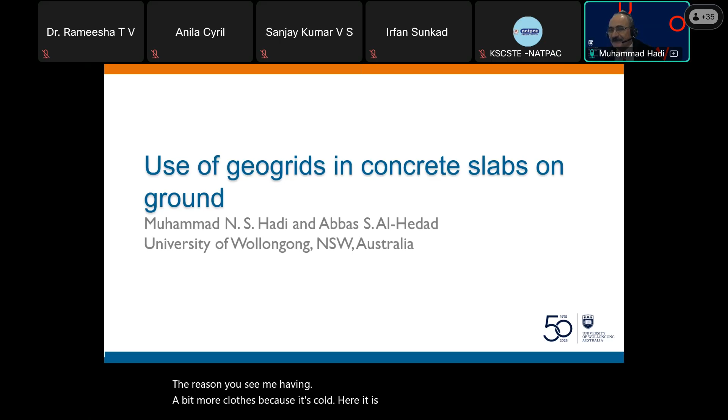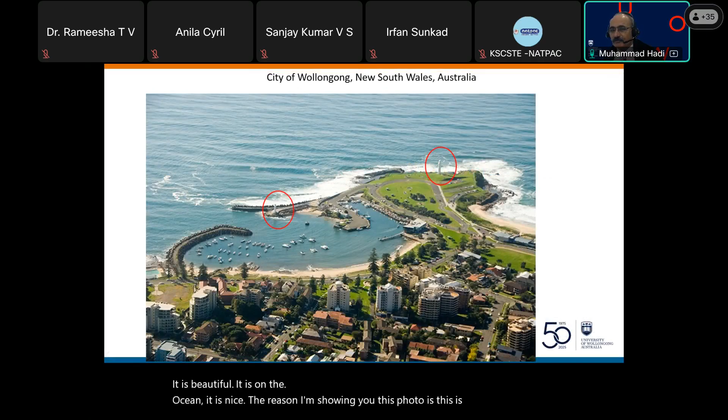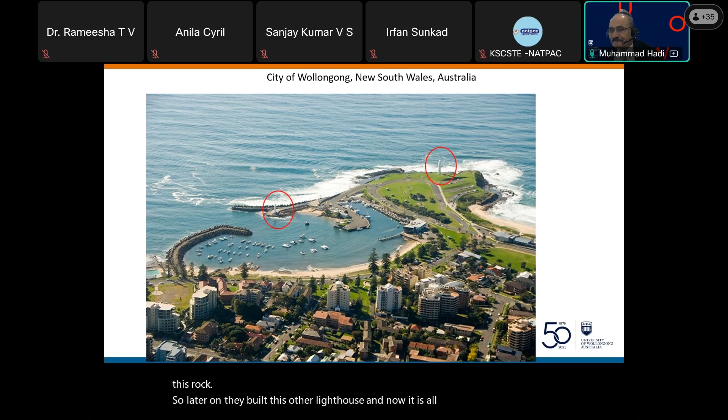So this is Wollongong. It is beautiful. It is on the ocean. It is nice. The reason I'm showing you this photo is this. This is a lighthouse. So people coming from the north can see this lighthouse, whereas people coming from the south cannot see this lighthouse. So they crash into this rock. So later on, they built this other lighthouse. And now it is all electronics, so there's no need for it.

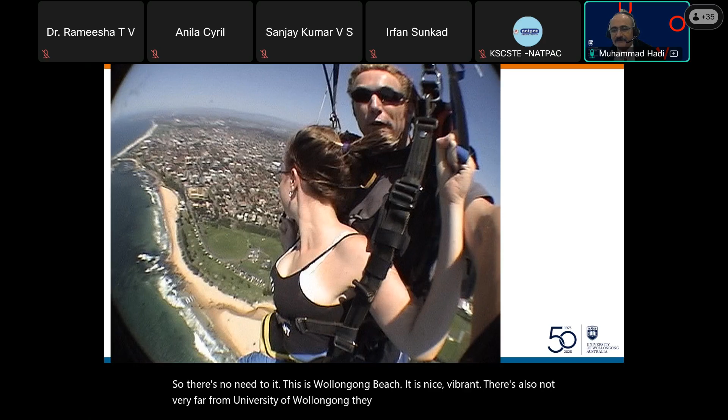This is Wollongong Beach. It is nice, vibrant. Also not very far from University of Wollongong, they do skydiving. And this is Stanwell Park. We are Wollongong. We are just south of Sydney, 80 kilometers south of Sydney. Australia is very, very big. Not as big as India, but it is big with a very small population.

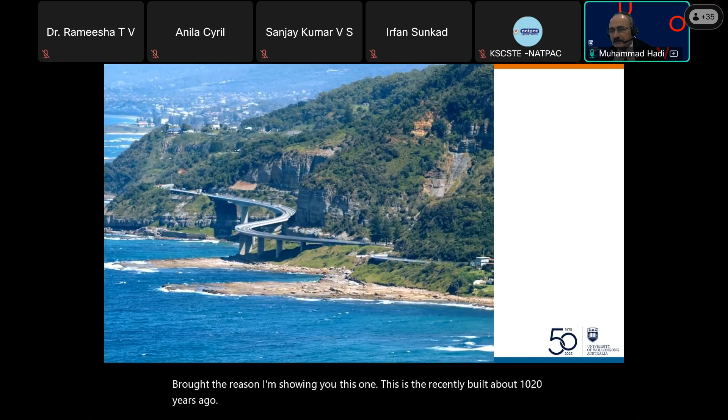There is a train, and of course there is road. The reason I'm showing you this one, this was recently built, about 10, 20 years ago. And here they used cathodic protection because this road, this bridge, is right on the ocean. So enough about UOW, University of Wollongong.

So I'm going to talk about some background, then geogrids, experimental program, results, conclusions. I'm going to end this part of the talk with another building at UOW, University of Wollongong. And then if time allows, if you allow me, I can show you what we use, the design method of rigid pavements based on Austroads.

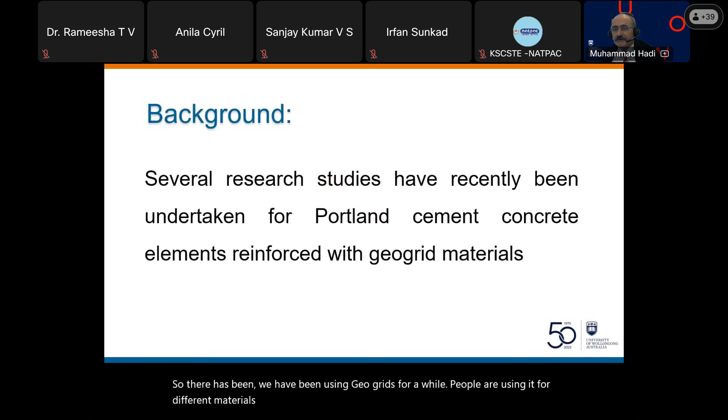So we have been using geogrids for a while. People are using it for different materials. And what is geogrid? Geogrid, they use it mainly for geomechanics, for retaining earth and the like. But we used it for a different purpose.

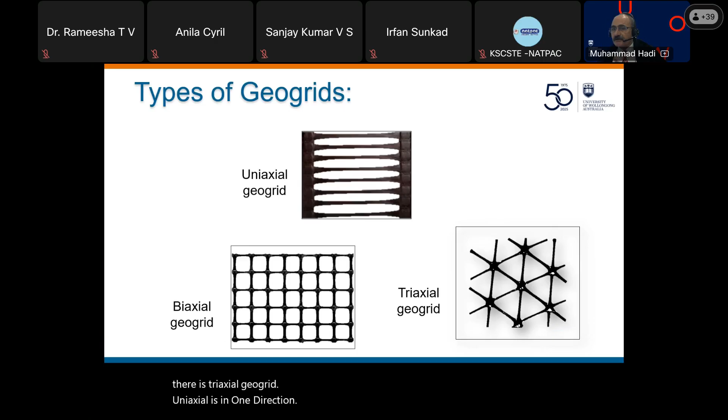Anyway, what is geogrid? So there is uniaxial geogrid, there is biaxial geogrid, and there is triaxial geogrid. Uniaxial is in one direction, biaxial 2 directions, and triaxial is in 3 directions. So people have used it in beams to reduce the cracks, and they put cyclic loading.

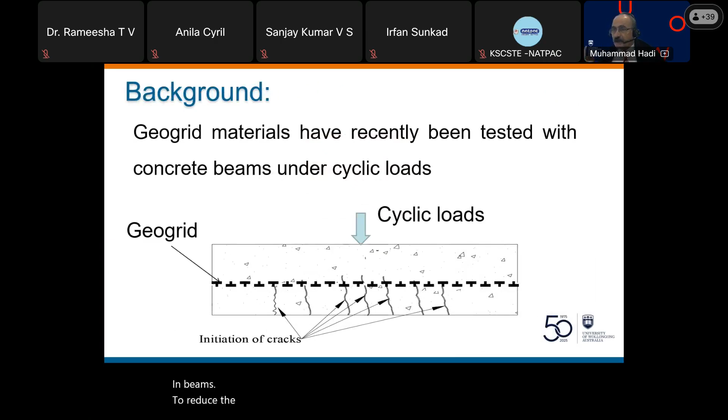So what is triaxial? It has high tensile strength, high corrosion resistance, and high tensile elongation. And I have to admit, I'm a structural engineer. I don't know much about these things, but we learned.

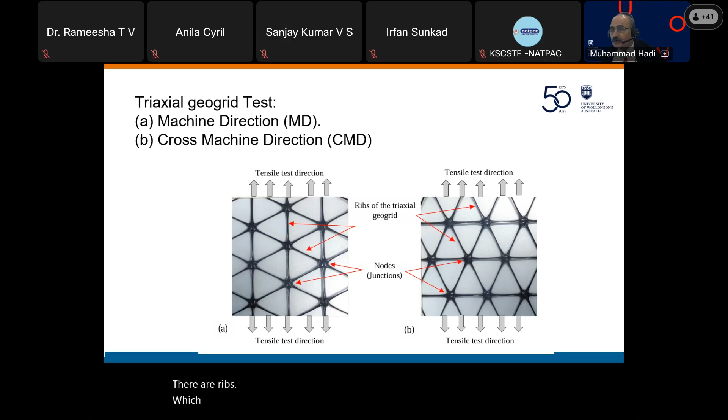And those geogrids, they call it machine direction, where some ribs will be parallel to the load direction, and cross machine direction, where these will be all diagonal. So the photo on the left is machine direction, and the photo on the right is cross machine direction. There are ribs which connect the nodes or the joints. So this is in general the geogrids.

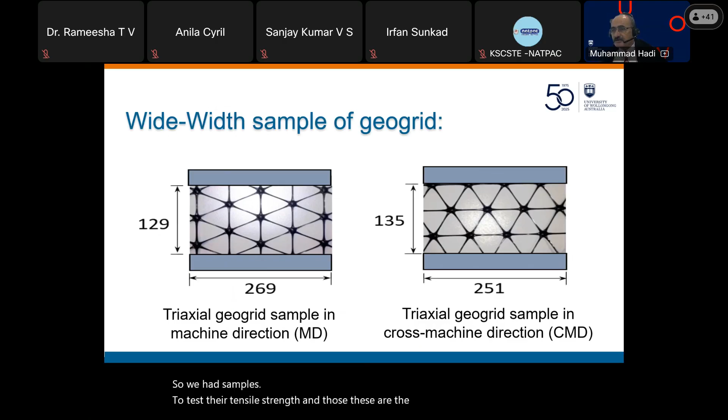So we had samples to test their tensile strength. And these are the dimensions based on the standards that we used at that time, ASTM and European standards.

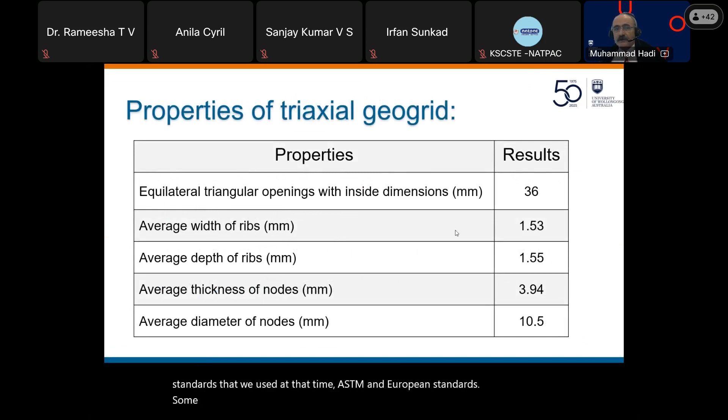Some results: the distance of those equilateral triangular openings, 36 millimeter internal; average width of ribs, 1.5 millimeters; depth of ribs, again, about 1.55; thickness of nodes, about 4 millimeters; and diameter of nodes, about 10 millimeters.

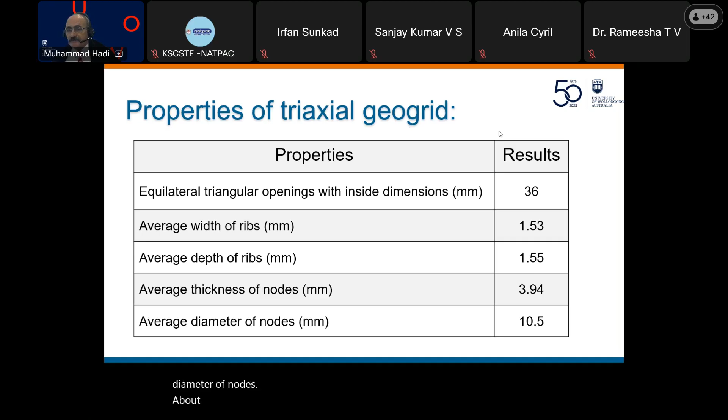So in our labs, we always do tests for concrete, for steel, and the like. But this one is different. So we had to build the jigs, the loading heads, and we used our Instron, which is a 50-ton, 500 kilonewton universal testing machine, and it has lots of properties. And we tested those materials, the triaxial geogrids, in 2 directions, in machine direction and in cross machine direction.

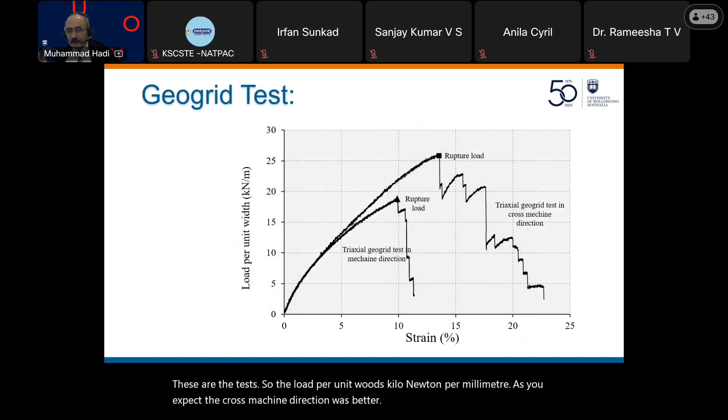And these are the tests. So the load per unit width, kilonewton per meter. As you expect, the cross machine direction was better because you are relying on the diagonals, not only in the rupture load, but also the strain.

We did some physical tests, and the elastic modulus is about 2.8 gigapascal. The rupture load, 19 and 26 for the machine and cross machine direction respectively, and the strains, 10 and 13, machine and cross machine respectively.

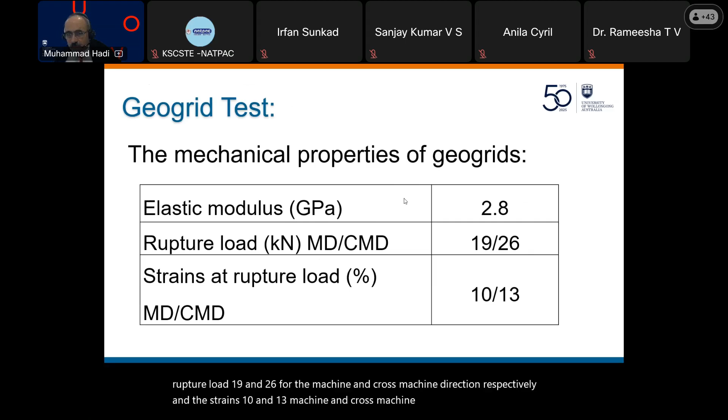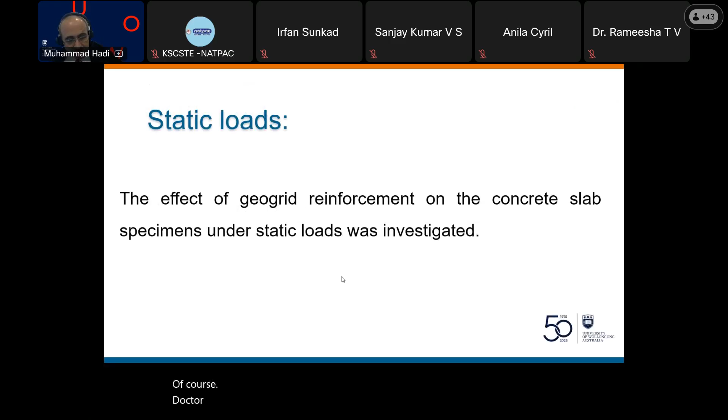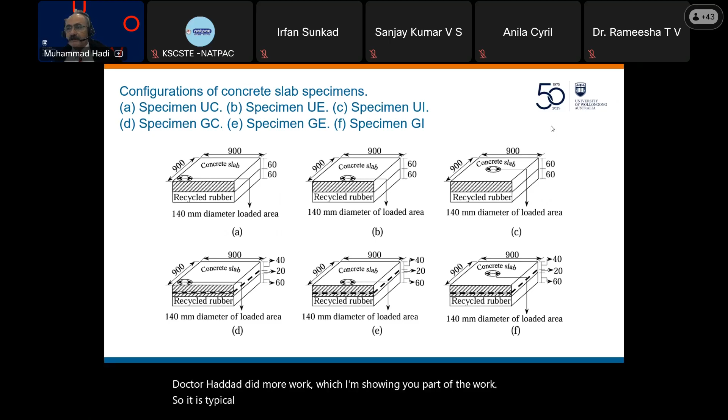We continued to look at the effect of geogrid on the concrete specimens under static load. Of course, Dr. Haddad did more work, but I'm showing you part of the work. So it is a typical investigation, and about 100 years ago, a gentleman called Westergaard came up with equations based on Winkler foundation, and there were three cases for loading concrete pavements: one corner, one edge, one internal.

So for this part of the research, we did 6 specimens, 3 unreinforced, 3 reinforced. And we tested them under loading concrete slab, loaded corner, edge, internal. The slabs were 900 by 900 millimeter, and the depth 60 millimeters. We put one layer of this geogrid material, triaxial, at 20 millimeter from the bottom of the slab. The load was circular, 140 millimeter diameter. So all those were easy.

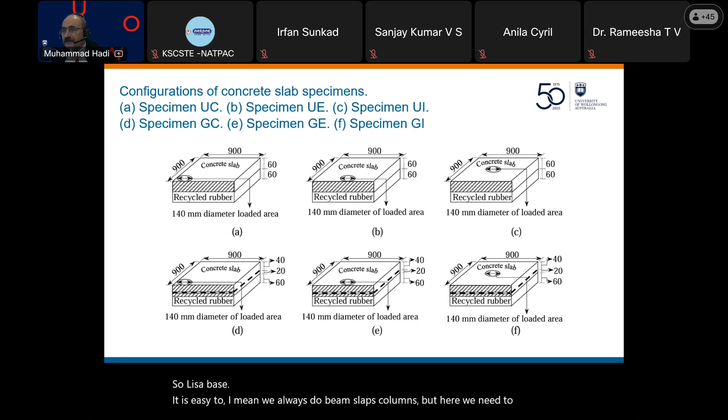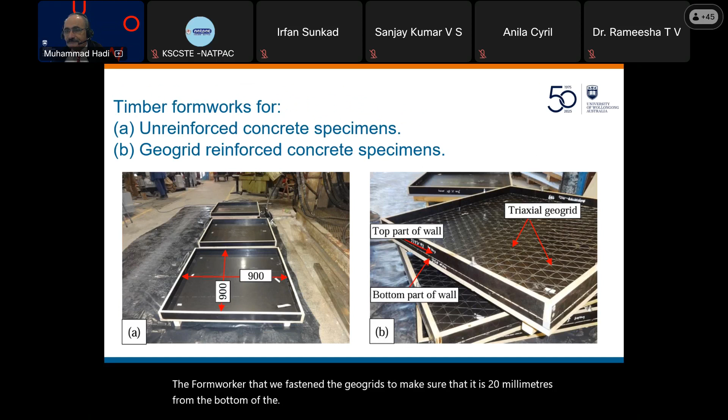So, the subbase. We always do beams, slabs, columns, but here we need to model the subbase. And to do this, we looked at a couple of materials. Before then, we had this formwork, 900 by 900. We put the formwork and then we fastened the geogrids to make sure that it is 20 millimeters from the bottom of the slab. Then we encased all this in a steel base. And of course, we manufacture all these things. So the formwork, all those are manufactured by ourselves.

Now, we came up with the subbase. The subbase, we cannot put it on steel, but we need to have something which has similar properties, which is what we call subbase material. The rigid pavement, we call it base, and the layer underneath, we call it subbase. So we looked in the market and we found recycled rubber. And actually we bought it and then we tested it similar to a plate loading test to end up with a K, modulus of subgrade reaction, to simulate the subbase. And 2 layers, 30 millimeter each of the recycled rubber. This is the subbase, and our base is the concrete slab.

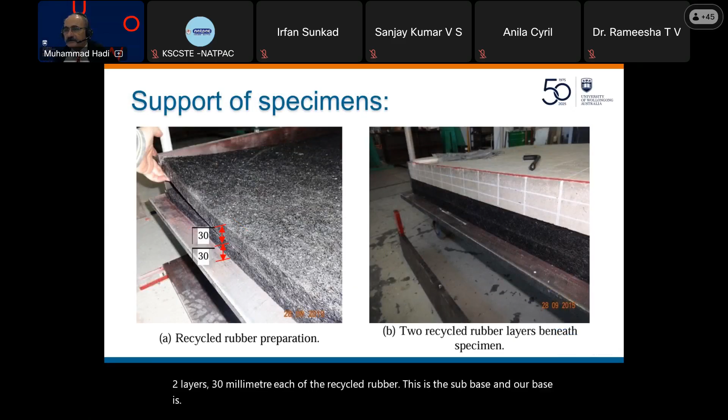Now I want to show you something here. This is before and after testing. You can see that the geogrid didn't move a lot. So we have reasonable casting. This is the section after the testing.

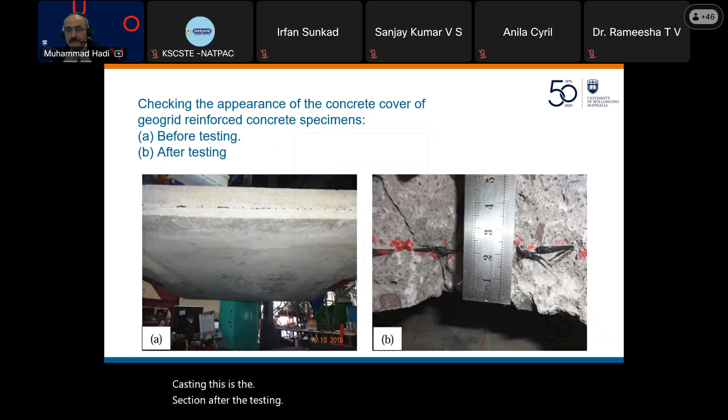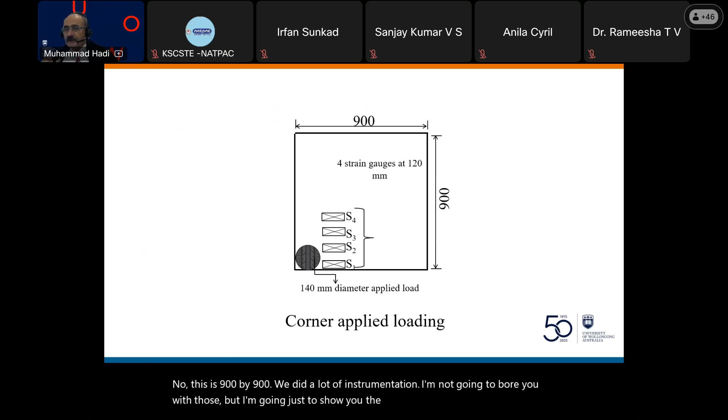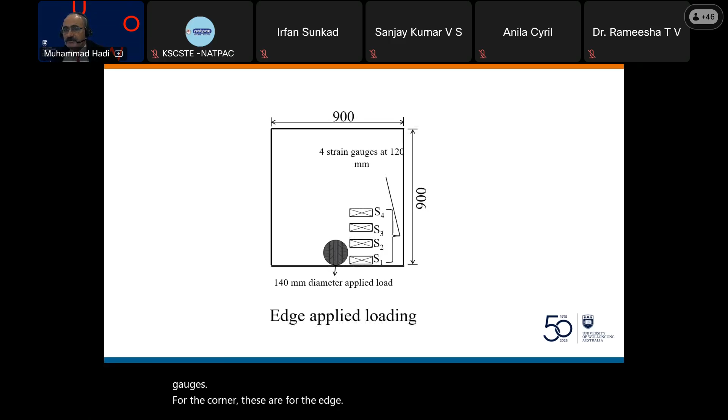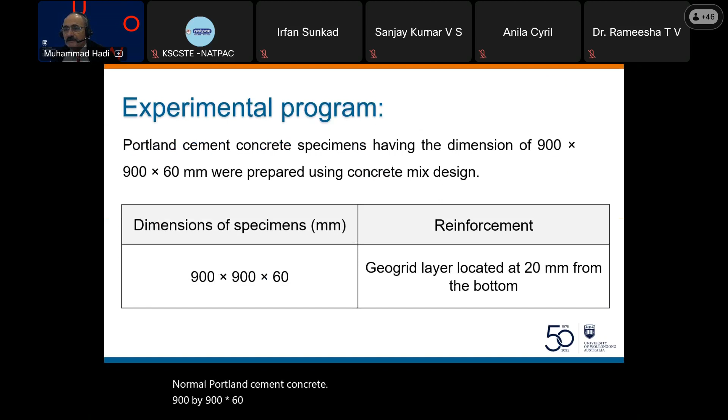Now, this is 900 by 900. We did a lot of instrumentation. I'm not going to bore you with those, but I'm going just to show you the important stuff. So these are some strain gauges for the corner. These are for the edge, applied loading, the strain gauges, and this is the interior load. You can see there are a lot of strain gauges. So this is normal Portland cement concrete, 900 by 900 times 60 thickness. And this is the concrete mix.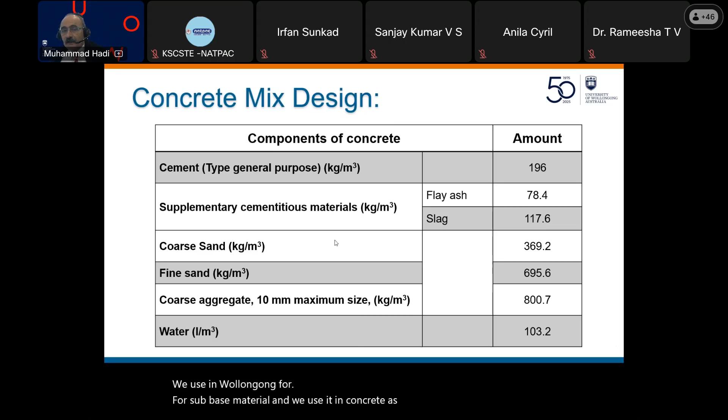So in Australia, most of the time, they use fly ash and slag as supplementary material. Indeed, Wollongong, because there is the steel works, so there's always slag. And for the last maybe 60 or 70 years, we use slag in Wollongong for sub-base material, and we use it in concrete as well. And the bleeding was not much. The slump was reasonable, 150. Density of concrete, compressive strength, normal. I mean, usually we use 32. It was about 40, and we do all these tests always.

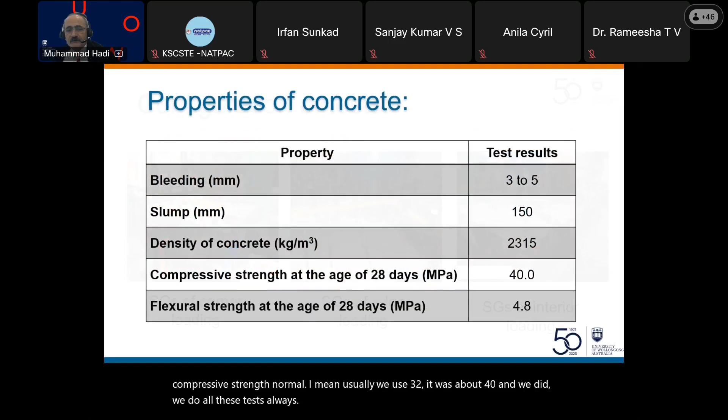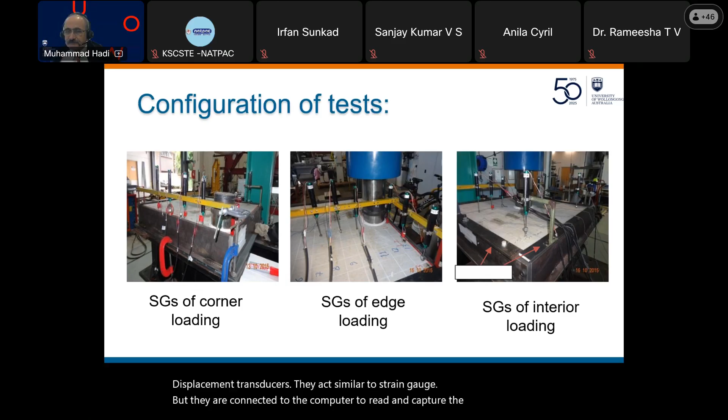And we tested those, and the first photo on the left is the corner, the edge, and the interior. We put a lot of strain gauges as well as LVDT, linear variable displacement transducers. They act similar to strain gauges, but they are connected to the computer to read and capture the deflections. So we always have two specimens identical except for the geogrid. So the U is the unreinforced, which is shown in figure A. In figure B, this is the geogrid. And we monitored crack width. When the crack is 2.5 millimeter width, what is the load?

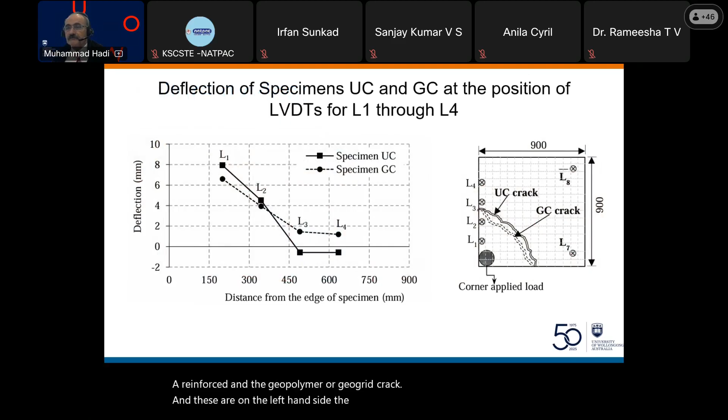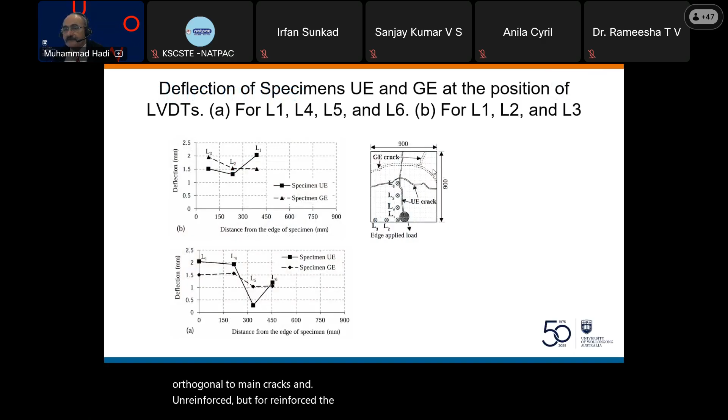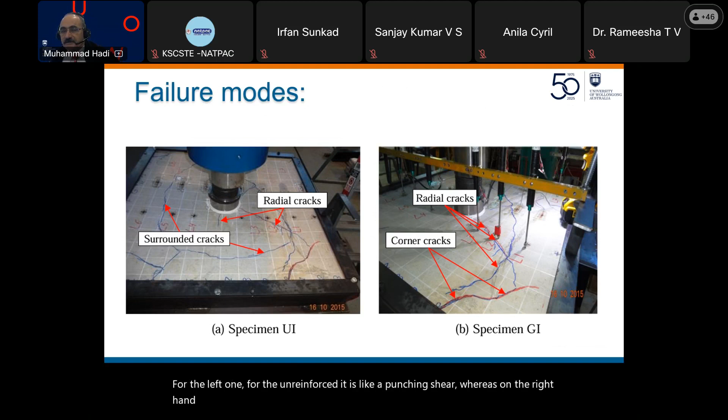And on the right-hand side, you can see the unreinforced and the geogrid crack. And these are on the left-hand side, the deflections. And we continued for the edge. And here you can see clearly the cracks are orthogonal to main cracks for the unreinforced, but for the reinforced, the cracks were further away. And the last one was the interior. The left-hand side is the unreinforced, the right-hand side is the reinforced. And you can see for the unreinforced, it is like punching shear, whereas on the right-hand side, the pattern is different. So you can see the cracks are different here.

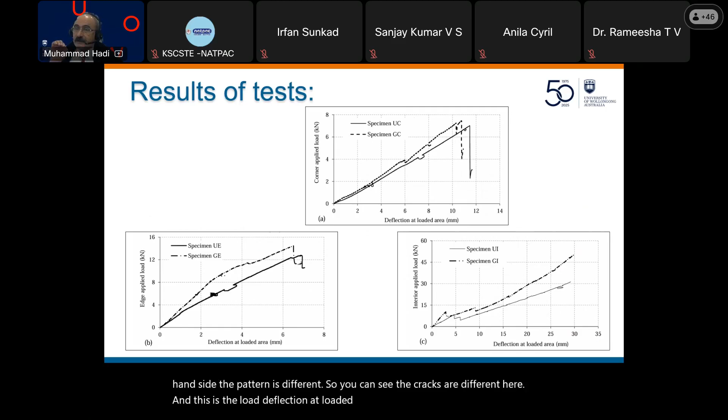This is the maximum for the unreinforced corner, whereas the P here, they applied to cause 2.5 millimeter crack width, 20 kilonewtons. Next one is 21, 24. Last one, 96, 150. And the deflection, as you can see, is also better. And we looked at the fracture energy and the ductility. So from this, we can conclude that the geogrid has some effect and it improves the properties of the concrete slab, concrete pavement.

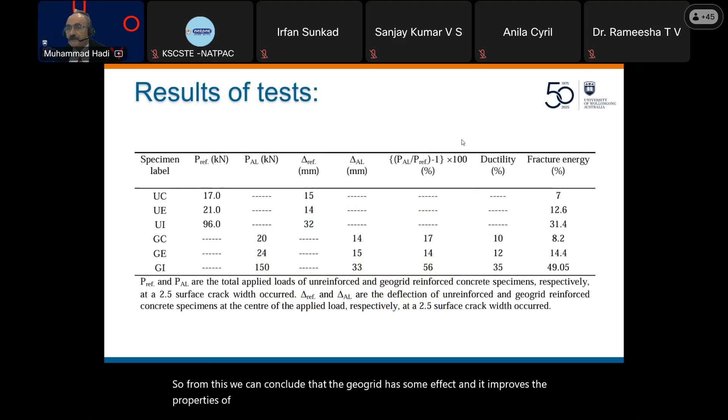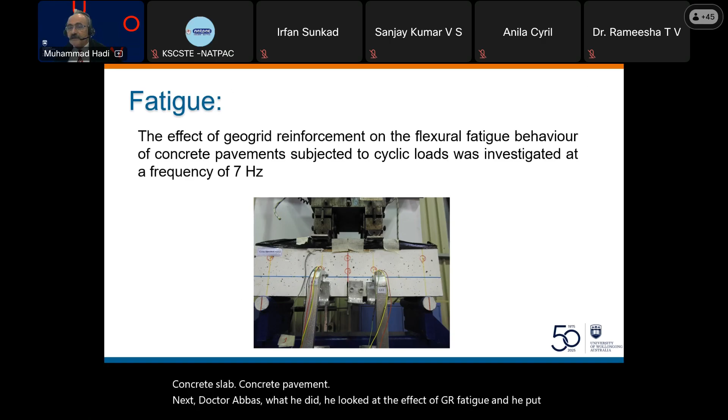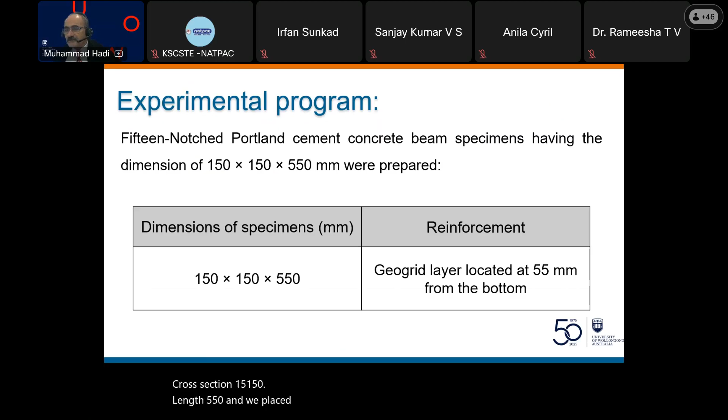Next, Dr. Abbas, what he did, he looked at the effect of fatigue, and he put geogrids and he applied cyclic loading at 7 hertz, 7 cycles per second. And in this case, I'll show you a bit more. Here we did beams, cross section 150 by 150, length 550, and we placed the geogrids at 55 millimeter from the bottom of the beam.

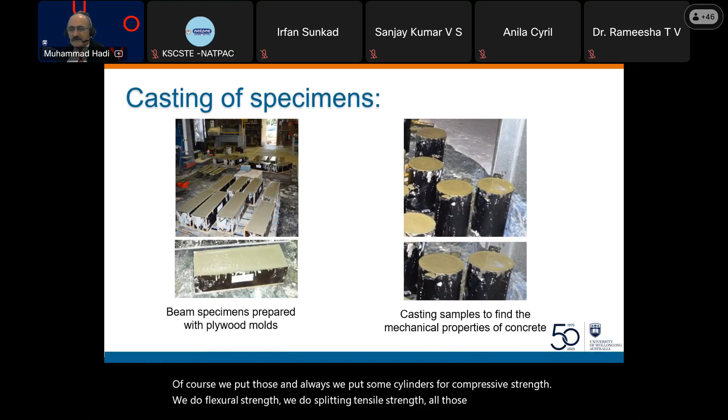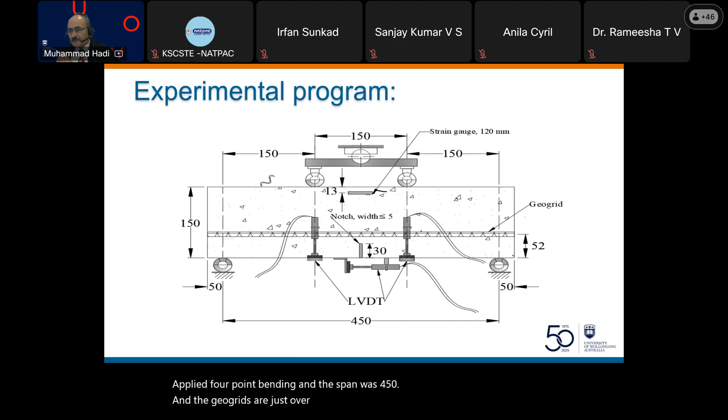Of course, we always put some cylinders for compressive strength. We do flexural strength, we do splitting tensile strength. All those are typical testing, but we do. And here, this is the fatigue, and we applied 4-point bending, and the span was 450, and the geogrids are just over 50 millimeter from the bottom, and we put a notch less than 5 millimeter width to simulate the crack, and its length is 30 millimeters.

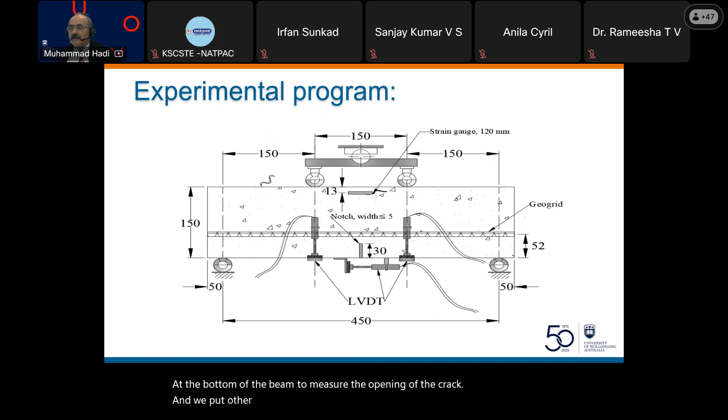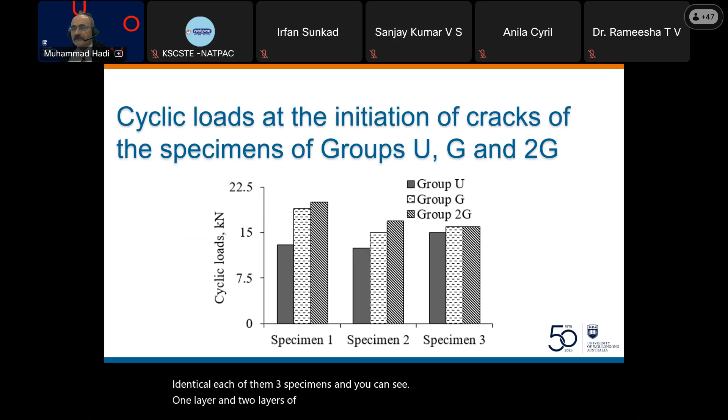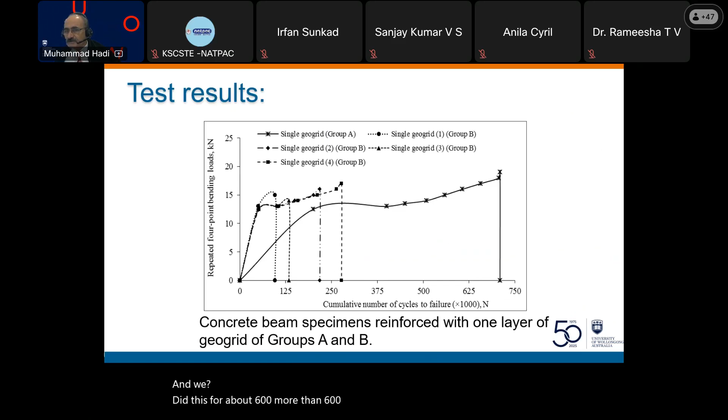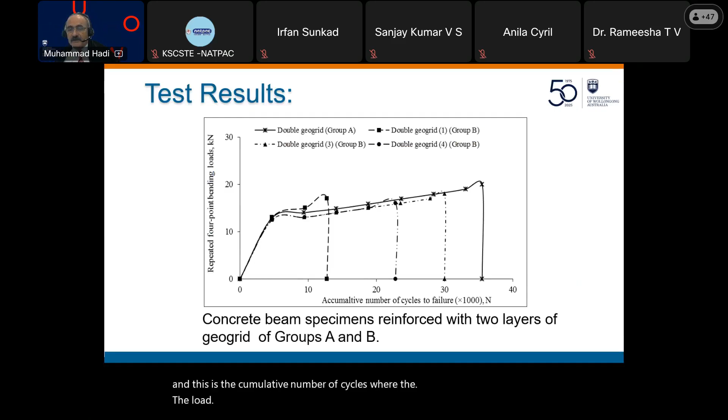This is the cyclic load, identical, each of them 3 specimens, and you can see 1 layer and 2 layers of geogrid, and the behavior was clearly much better. And this is the repeated 4-point bending, and we did this for more than 600,000 load repetitions, and this is the cumulative number of cycles where the load applied and failure to occur.

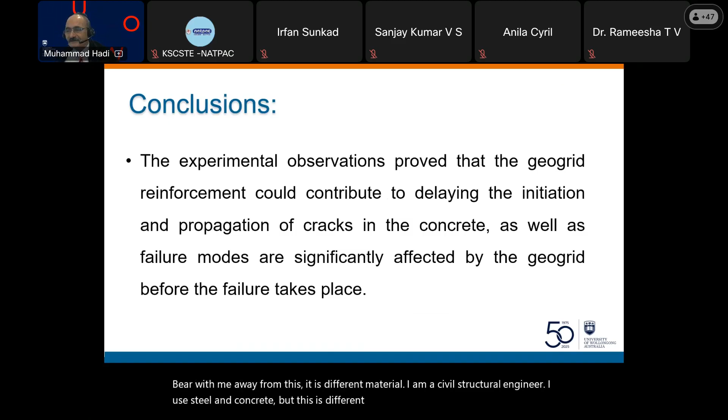So bear with me. From this, it is a different material. I'm a civil structural engineer. I use steel and concrete, but this is a different material, and it may be of benefit. There is a little bit of increase in strength, but also there are others, like reduction of cracks and the like.

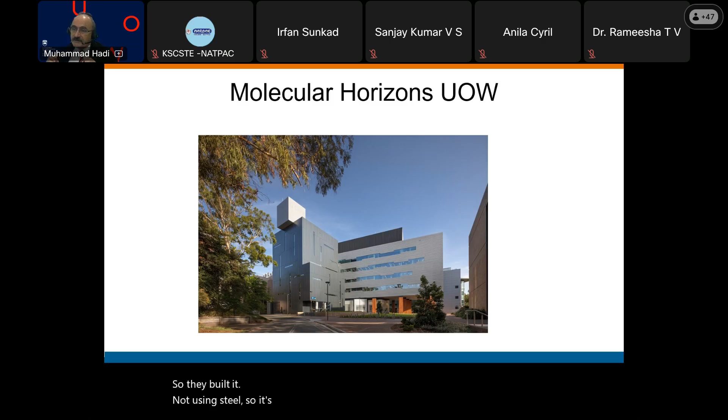I'll just take 2 minutes from your time. This is a building at UOW, University of Wollongong. It was built about 5-10 years ago on campus. I visited it. It has an electron microscope, so this is the reason they don't want any magnetic field. So they built it not using steel. It's concrete, but it was reinforced with FRP, fiber reinforced polymer.

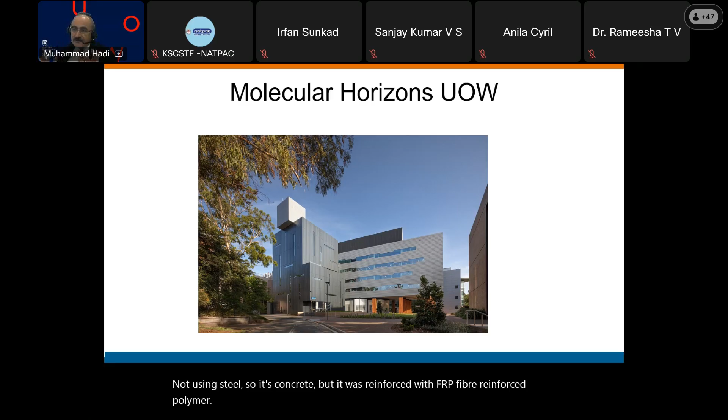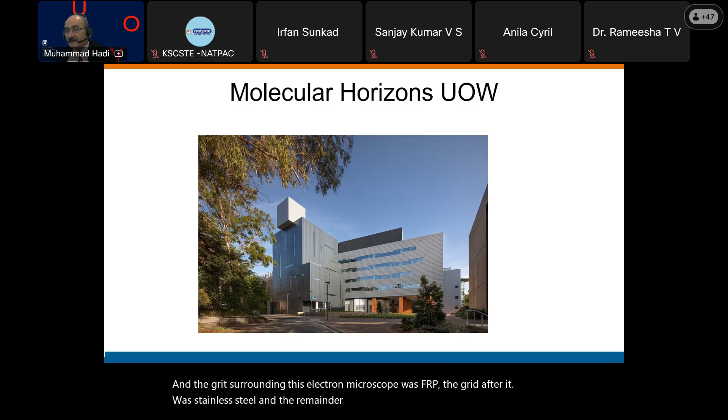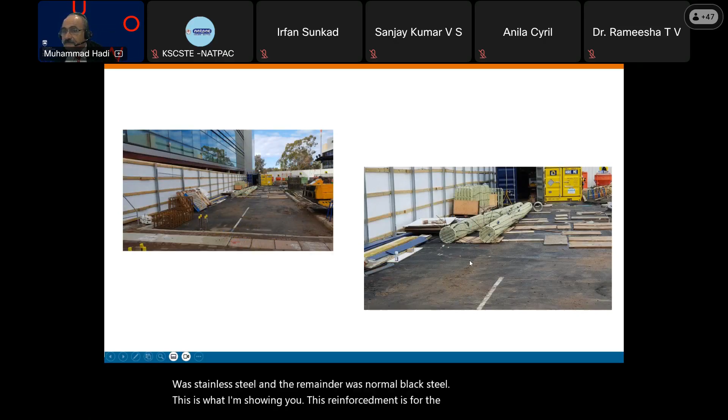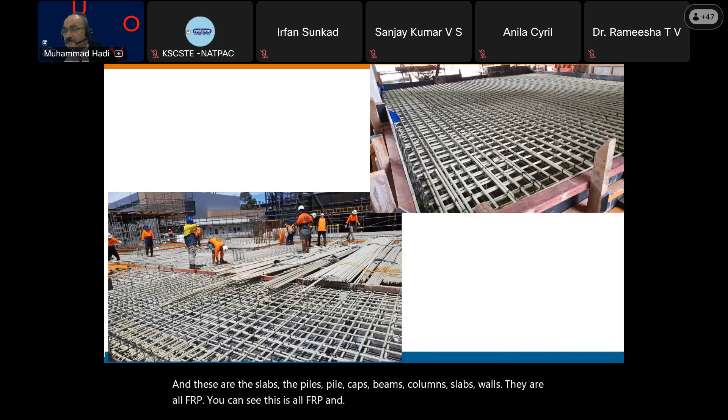And the grid surrounding this electron microscope was FRP. The grid after it was stainless steel, and the remainder was normal black steel. This reinforcement is for the piles. And this is when I went on a site visit, these are the columns and the walls. They are all FRP. And these are the slabs. The piles, pile caps, beams, columns, slabs, walls, they are all FRP. And I visited this, I think 1 year ago, and there was no problem.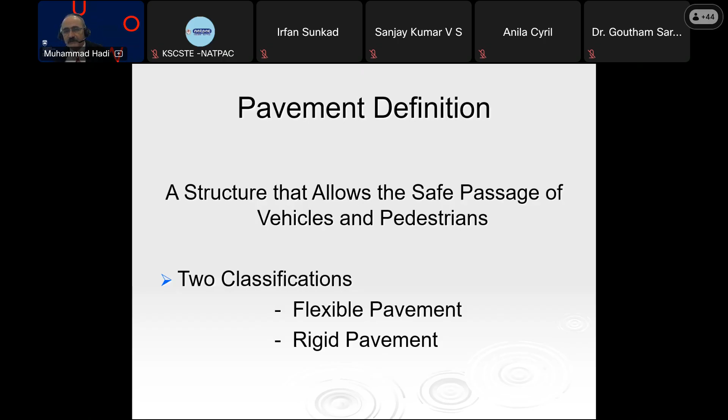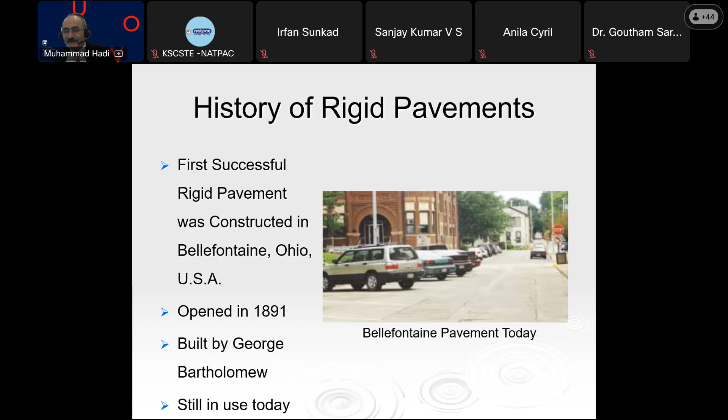So we have, probably you have seen this one. It was built in 1891 in the USA, in Ohio. So 130 years old, still going. So this is the first rigid pavement. And we assume we have subgrade, subbase, and base. And then these are the types of pavements that we follow in Austroads. And then obviously we are getting more and more use.

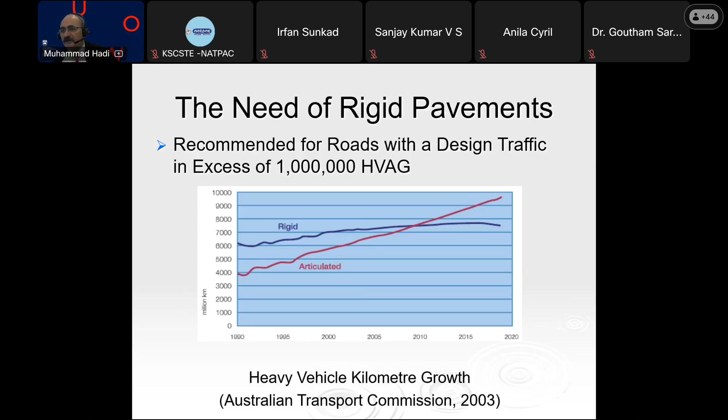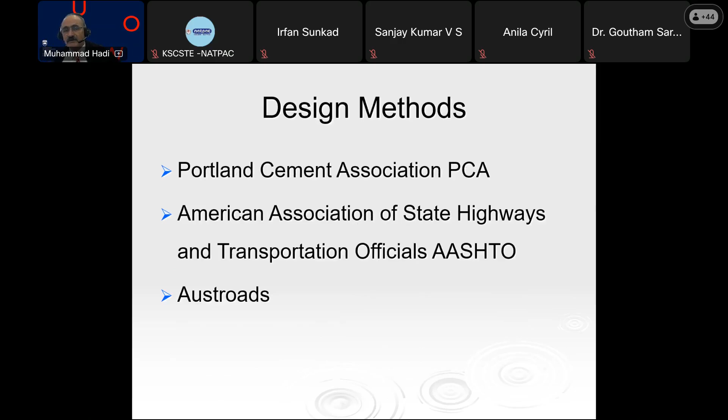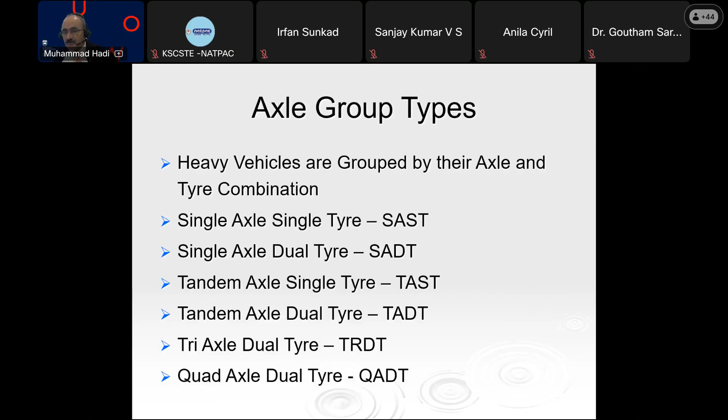In Australia, we have not only semi-trailers, we have what they call road trains. So it is basically a vehicle, and then there are 3 trailers, and they are very, very heavy. So there are a number of methods, but Austroads uses a different way. These are the classifications of the types of loading: single axle, single tire, and so forth. And this is the design traffic: the annual average daily traffic, then direction factor, percentage of heavy vehicles, number of axles per heavy vehicle, and then the accumulation, how much it increases.

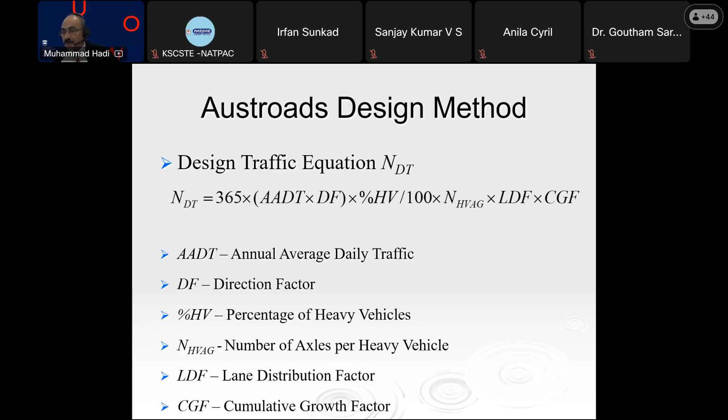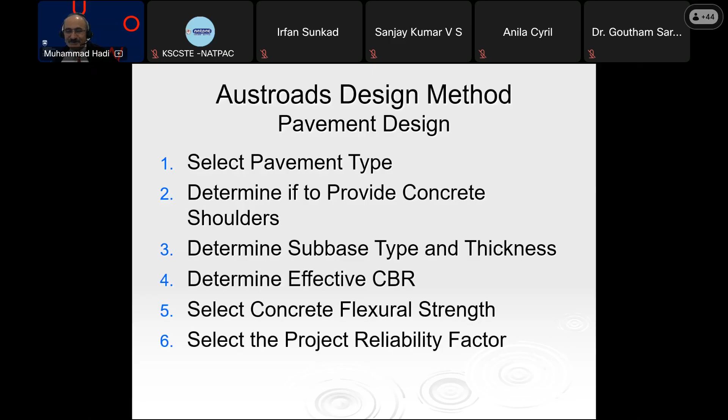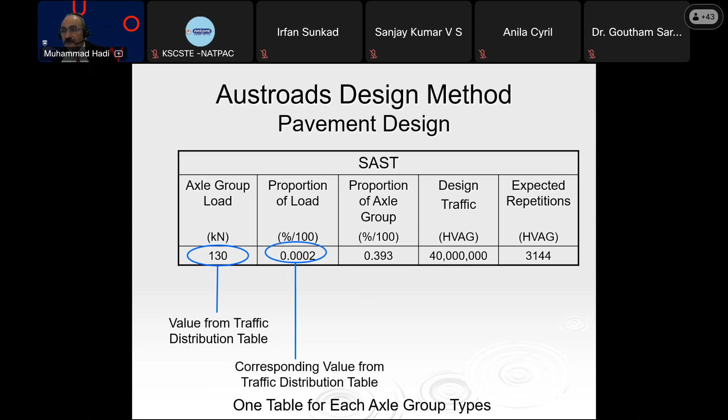The design is: select pavement type, then shoulder or no shoulder, subbase type, effective CBR, concrete flexural strength, reliability. This is not new, 20 years old. And select trial thickness. And then there are those which are really, really difficult. You start with axle group, then proportion of the load. Either you go and measure, count the number of loads, or there is a guide in Austroads. And then proportion of axle groups, then expected repetitions, and this is the design traffic.

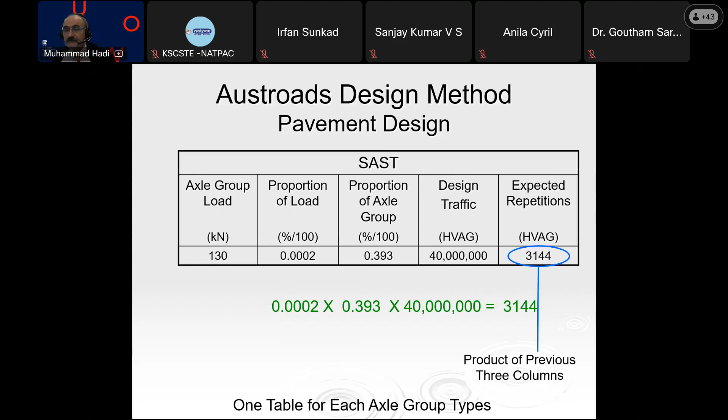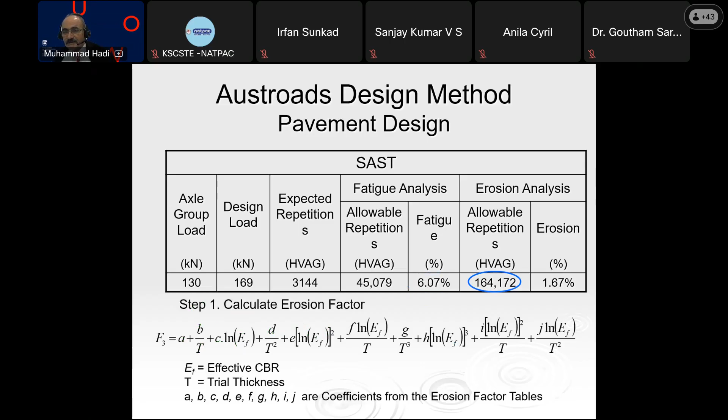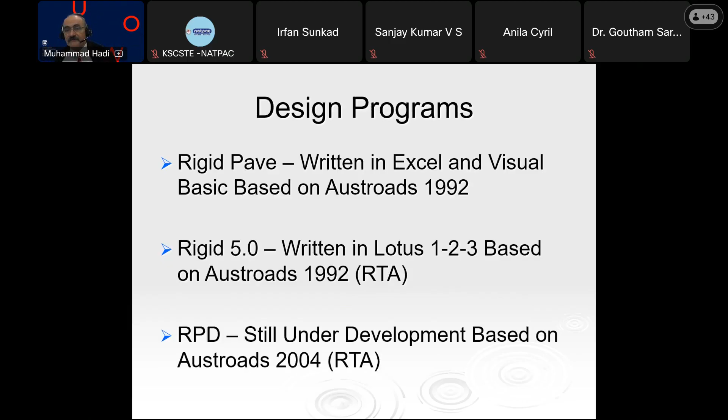And then you continue for the erosion of the subbase, and you go with all those calculations, and you repeat all those for all 6 types of axles for all loads. And then you do the reinforcement, and it is a lot of work. So I had a student who did RigidPave, and it was working until Excel changed the codes and Austroads changed. So this student came with this one, very simple.

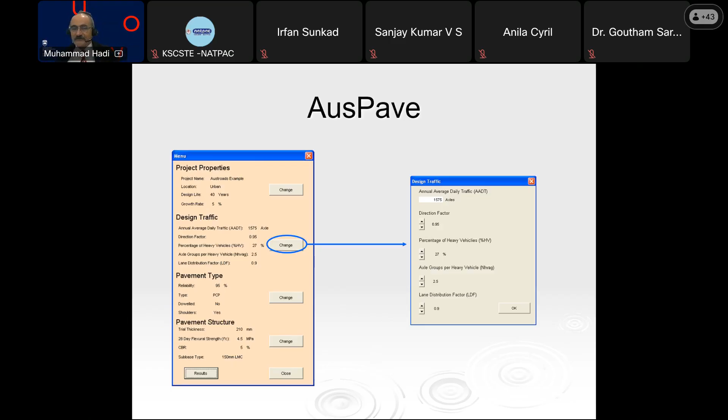This is AusPave, and you just change project properties, design traffic, pavement type, pavement structure, and you just play with it, click. It's a very, very clever way of doing it. And here, these are the results. We did some evaluation, and this program has been working for the last 20 years.

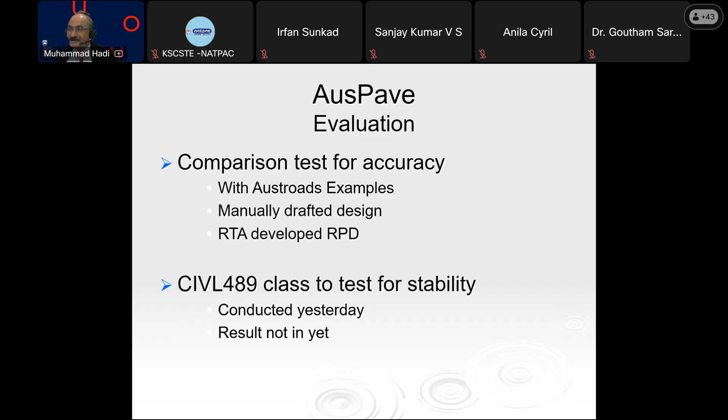So I will stop now, and I'm more than happy to answer any questions. I hope that I showed you something different and hopefully not boring.